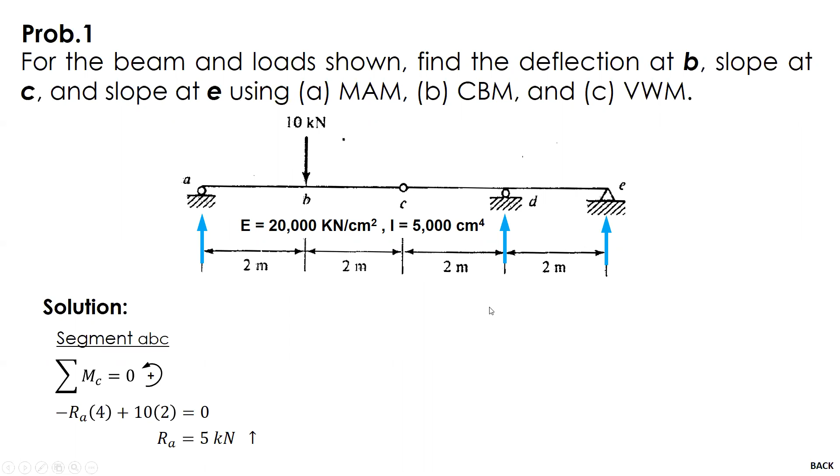So muna ang buhaton. You assume the reaction direction upward. Consider segment ABC, sum up moment at C, and you get RA. RA is positive 5, so it's upward. Then consider the whole beam, sum up moment at E, and you can solve for RD. It's positive again, so therefore upwards. Then summation of moment, summation of force along the vertical gives negative 5, so therefore downwards. So the reactions: RA is upward, RD is upward, RE is downward.

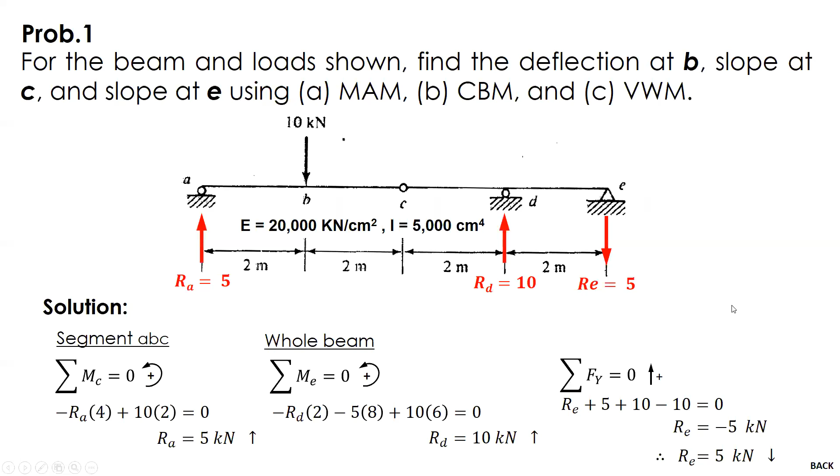So for the moment area method, once we have the reactions, then we draw the moment diagram by parts.

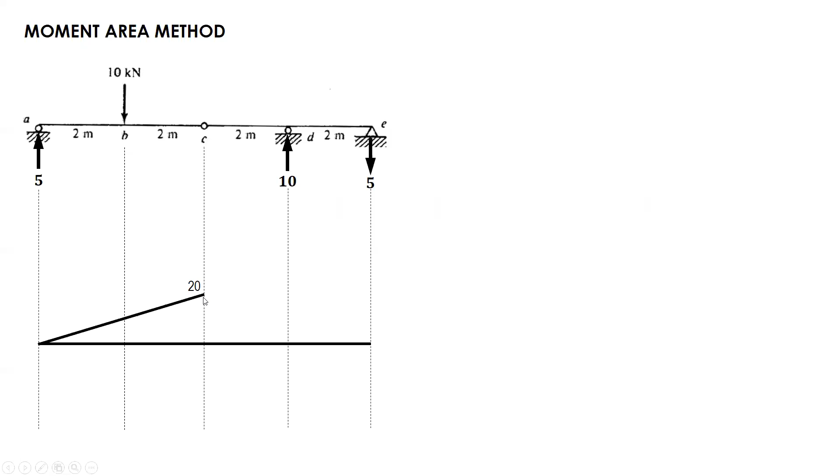The most convenient point is the hinge, so we fix it there. And then we draw the values: 5 times 4 is 20, and this one, 10 times 2 is 20 also. Then 10 times 2, 20. 5 times 4, 20. 20. 5 times 4, 20. So this is your moment diagram by parts.

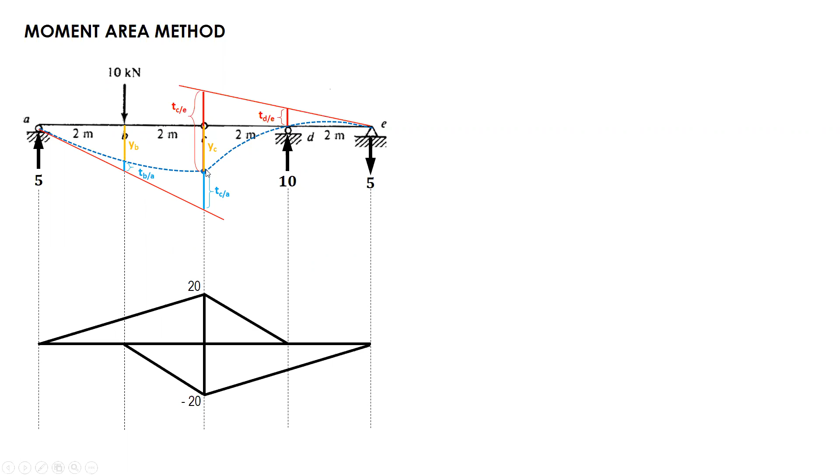What we need to find is the deflection at B. So in order to solve for YB, we use ratio and proportion by similar triangles - 1 over vertical over horizontal, vertical over horizontal. But before we can solve for YB, we need to solve for the deviation of B slash A, deviation of C slash A, and also YC.

For YC, we manipulate from this side. The deviation of D slash E, and then deviation of C slash E, and then we do ratio and proportion to get YC. And then after that, combining the two, we get YB.

So let us first solve for this one, the deviation of D slash E. You'll be considering the area from D to E. So by ratio and proportion, 10 is to 20, and the area is negative 10: 1/2 of 2 times 10 is negative 10.

To make it straightforward, deviation equals area times distance. Deviation of D slash E: area negative 10, times the distance from the centroid to D, since D is where we're getting the deviation. So 1/3 of 2 is 2/3, giving negative 20 over 3.

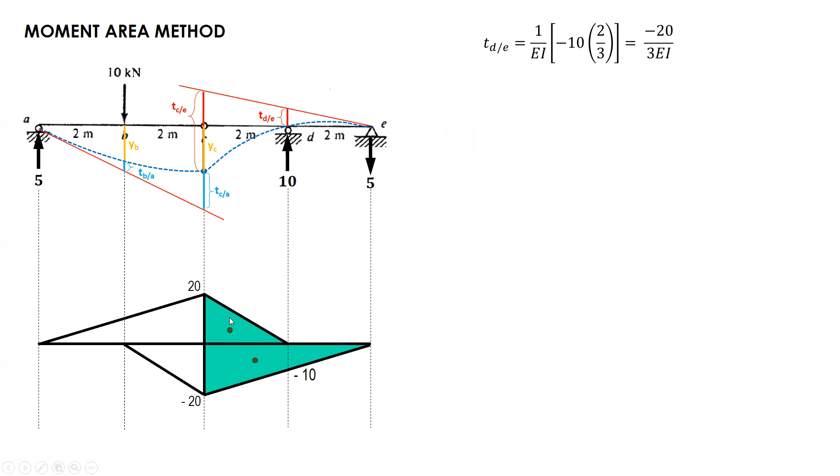And then for the deviation of C slash E, we get the area from C to E. The negative 10 goes away. So the area is 1/2 of 2 times 20, which is 20. Then 1/2 of 4 times 20 is 40.

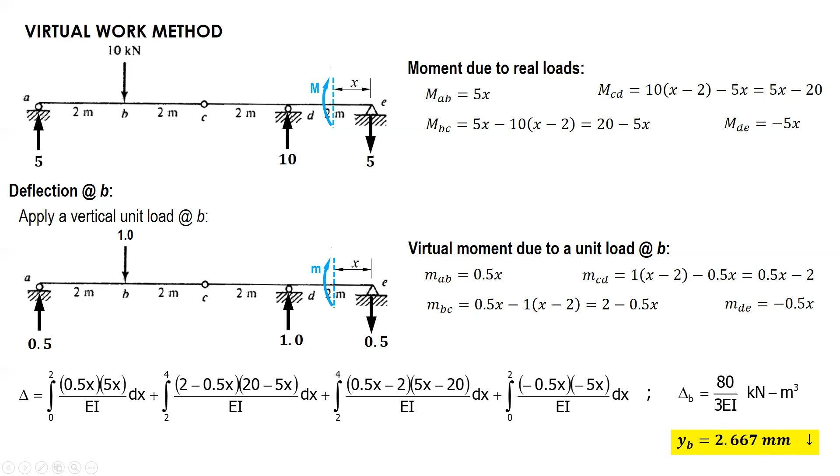Okay, so okay na ni. Next.

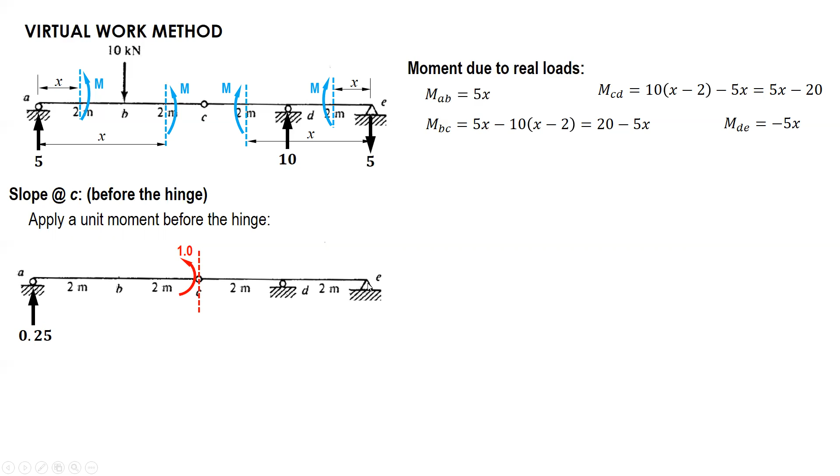And then considering the whole beam, summing moment at E, you get RD. You can just compute - the answer is 0.5. And the summation of force gives 0.25. And then moment, cut: 0.25x.

That's the moment, so directly that would be 0.25x minus this. The result is 1 minus 0.25x, and lastly for DE, 0.25x. And then it's the virtual work equation - none of them are zero, so all are evaluated.

And when you solve this, the result is positive. Therefore, counterclockwise - same as the other methods.

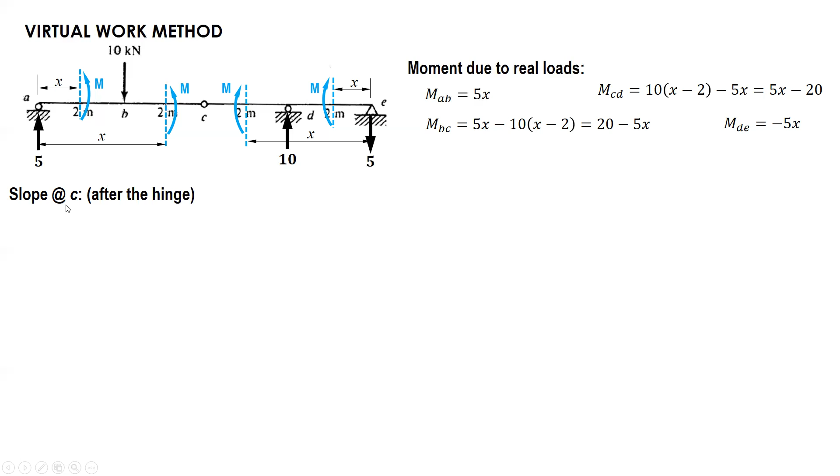And then lastly, after the hinge, you should not apply the moment after the hinge. So this is what happens - if you apply the moment after the hinge, when you cut the moment at C and analyze the left side, it will not be affected. This will not be included in summing the moment. So it's zero, since you wouldn't cut it there, but since the moment is after, there's no force or moment on this side, so it becomes zero.

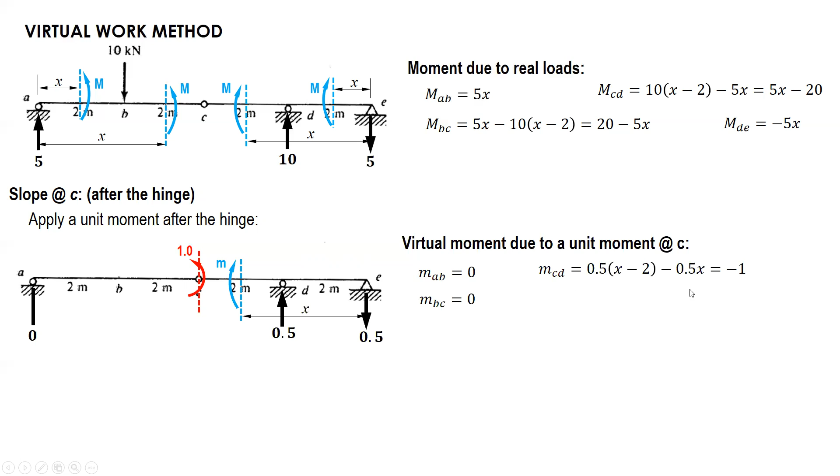And the result is positive 50/3EI. Positive means counterclockwise - same as assumed. Okay, so this is the answer for problem number 1.

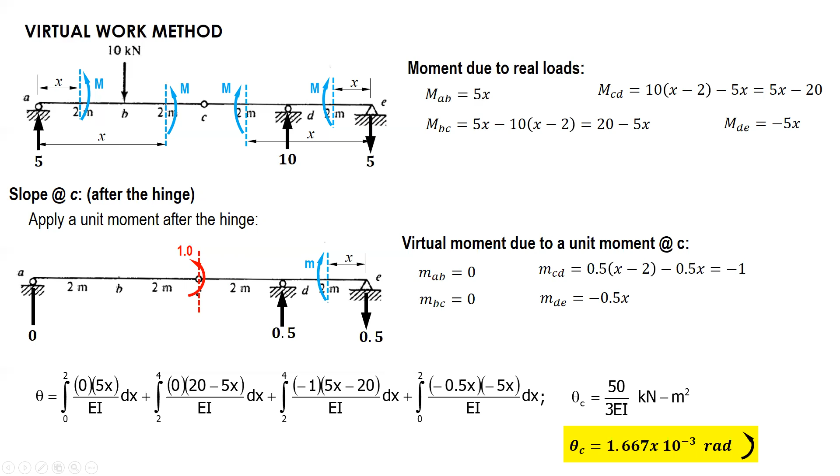For problem number 2, the overhanging beam is loaded by a uniform distributed load as well as a concentrated force as shown in the figure. Determine the maximum deflection using the double integration method, moment area method, and conjugate beam method. Use E equal to 30,000 KSI and I equal to 400 inches to the fourth power.

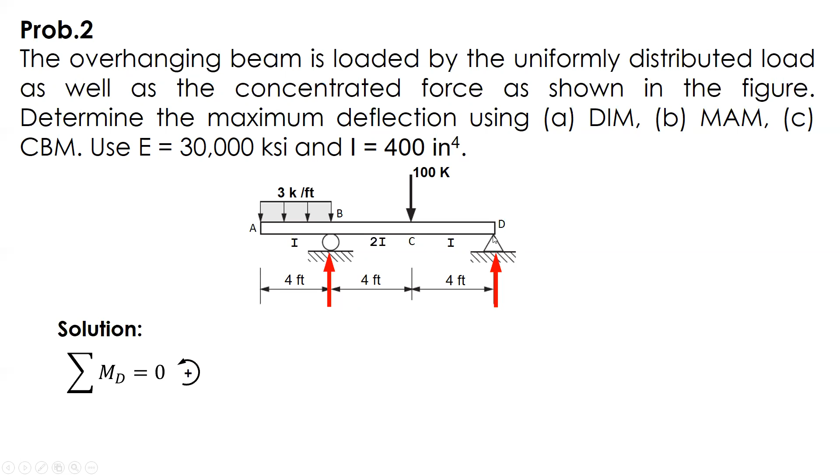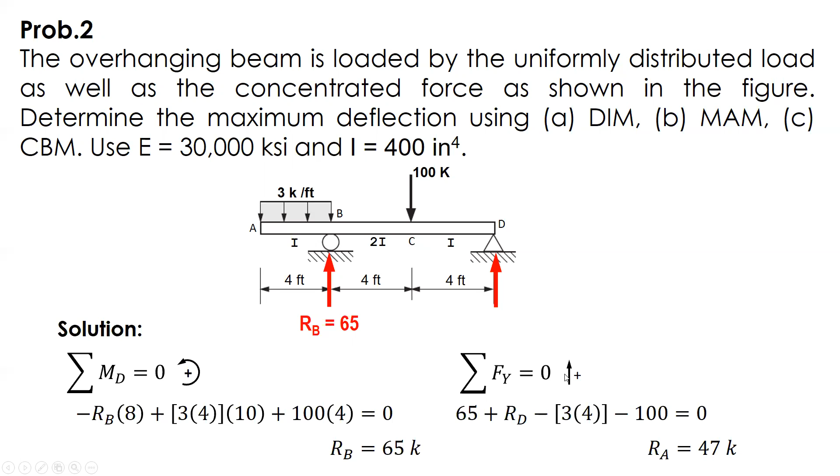First, solve for the reactions RB and RD. Summing moment at D gives RB, which is 65. And then summation of force in Y gives 47.

Okay, so for the double integration method, segment by segment: AB, x - so this is the equation. 3x minus 3x times x over 2, which simplifies to negative 1.5x squared. The resultant is 3x, and the distance is x over 2. So integrate - the result plus C1, integrate again for moment.

And then segment BC, cut here. This is your x. So your moment is 65 times x minus 4 for this one. The resultant here is 3 times 4, which is 12. The distance is x minus 2, which is 4 minus 2.

And then integrate, take note of our I is 2i. So that's it.

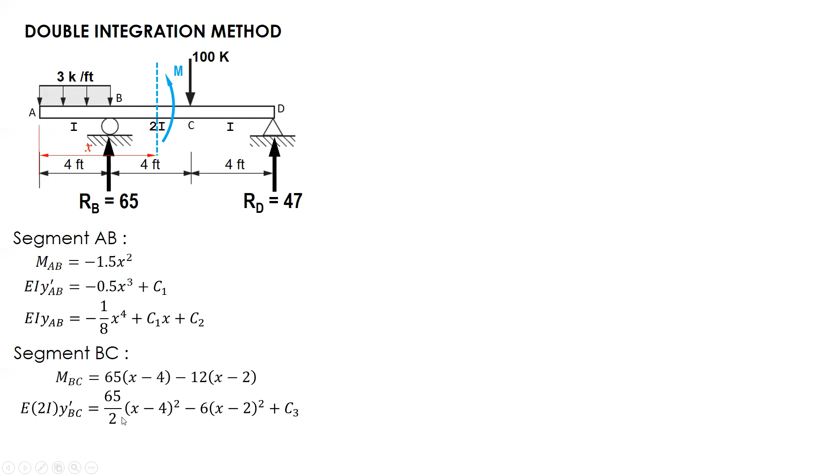So to simplify, divide it by 2. 65 over 4 becomes, and 6 over 2 is 3. The C3, if you divide it by 2, it can still be C3, even in DE, right? It's just a constant. Constant divided by another constant, the answer is still a constant. So it doesn't matter if it remains C3 or becomes C3 over 2, the final answer will still be the same.

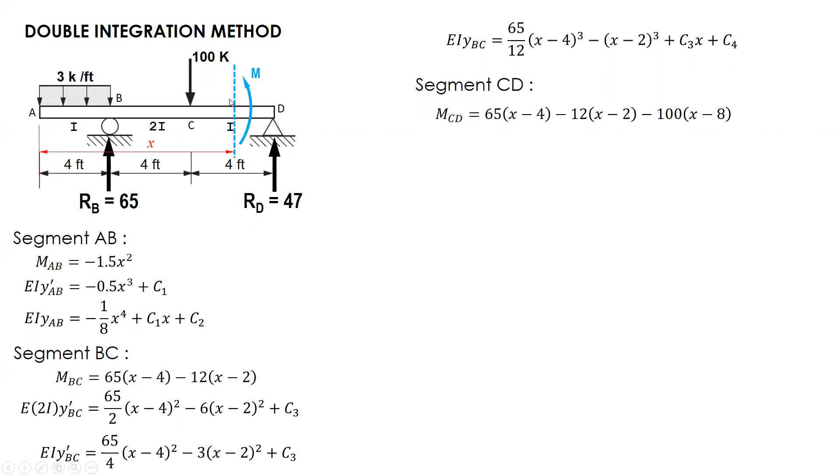You will have 6 unknowns. So boundary condition, okay, let's start here.

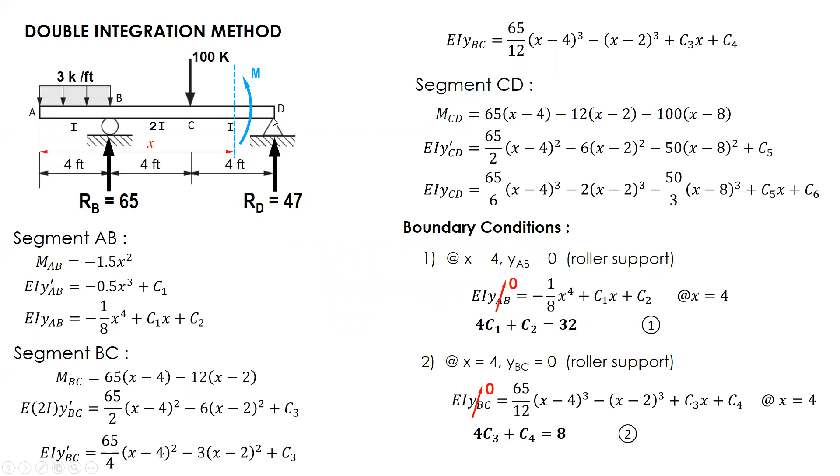Equation 2. And then at x equal to 12, here, YCD equal to 0. So 0, and then substitute 12, 12, 12, 12, and 12, you will have this.

Equation 4, slope AB equals BC. At x equal to 4, just substitute, it becomes 0, 4 minus 2. You will have this.

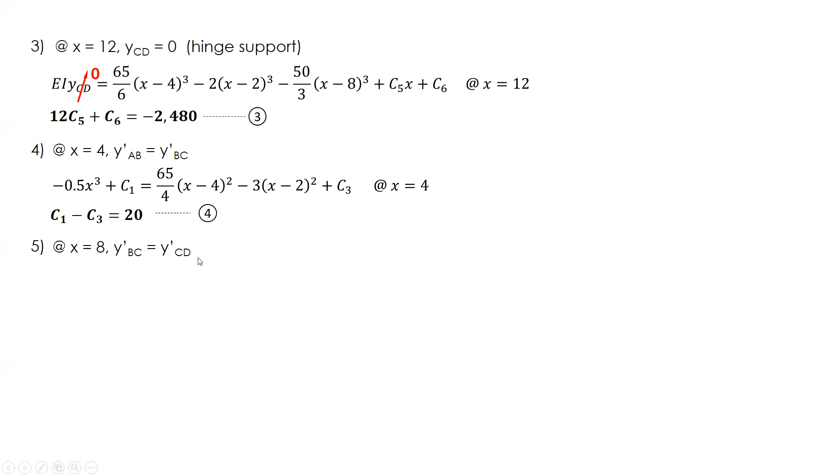And then 5, at x equal to 8, junction C. Slope BC equal to slope CD, this one, at x equal to 8. Just substitute, 8 minus 4, and that's the result.

And then last, at 8, deflection BC equals deflection CD. This one, at x equal to 8, you will have this. Just substitute 8, 8, 8, 8, 8. This becomes 0, then 8.

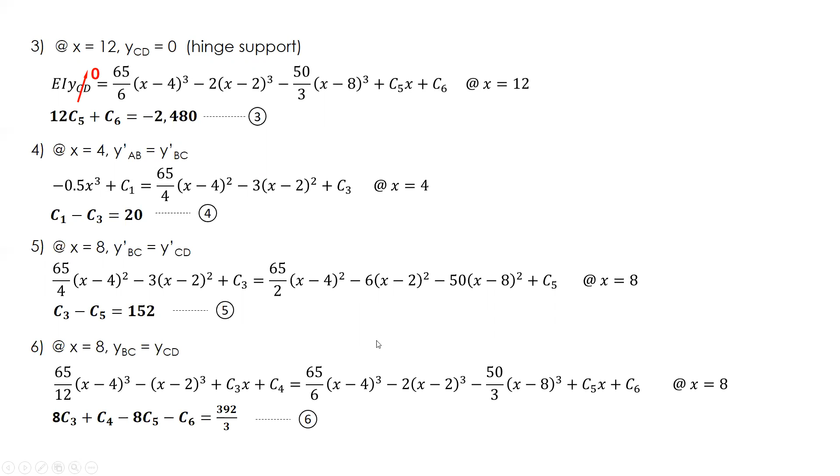Equation 6. So let's summarize the 6 equations. That's it. Equation 1, 2, 3, 4, 5, 6. Easy, we'll just eliminate.

First, let's eliminate C6. Let's combine 3 and 6. To eliminate C6, we add them. Equation 3 plus 6, and this will cancel out. So 8C3, C4, 12 minus 8, so 4, right? That's it, 8. Negative 2480 plus 392 over 3 is the result.

Equation 7. Next, eliminate C1. Combine 1 and 4. To eliminate C1, we multiply equation 4 by 4, and then subtract so it cancels. What's the result? So C2, then 4C3, right?

But it becomes plus since we subtract it, minus, negative, so positive. And then 32 minus 4 times 20, negative 48. Equation 8, right?

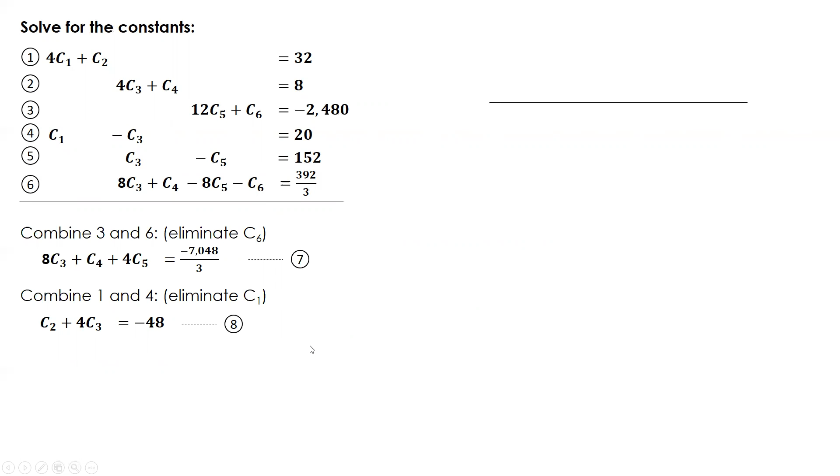Okay, we cannot eliminate C2, so there's no line for C2 here. So next to eliminate is C5. Okay, let's combine.

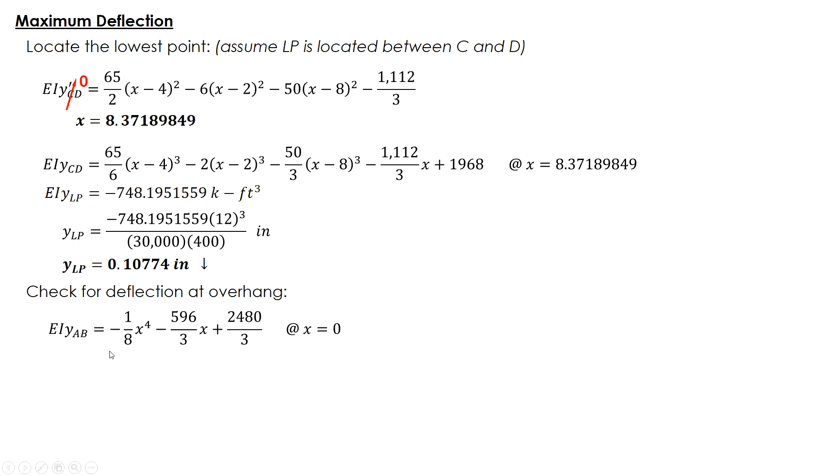Substituting the values and converting, the result is 0.11904 inches, which is larger compared to the rest. Therefore, this is the maximum deflection, occurring at the overhang.

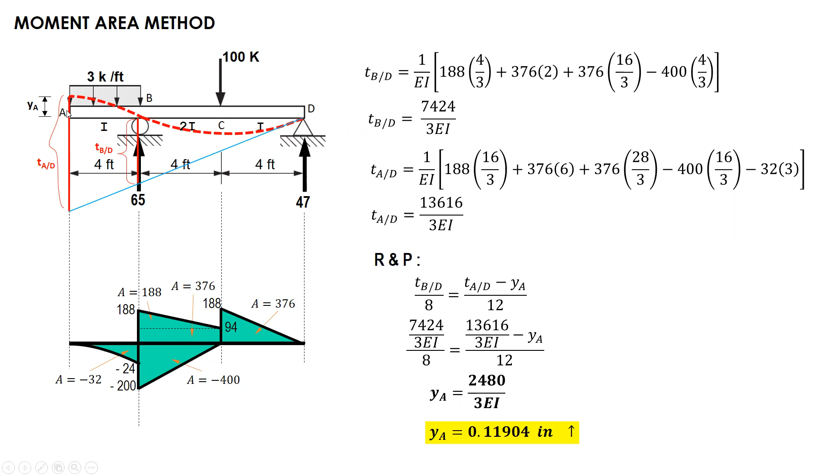And the last method, the conjugate beam method, we'll use the same moment diagram as in the moment area method. Since it's free, it can become fixed, and this becomes an internal hinge.

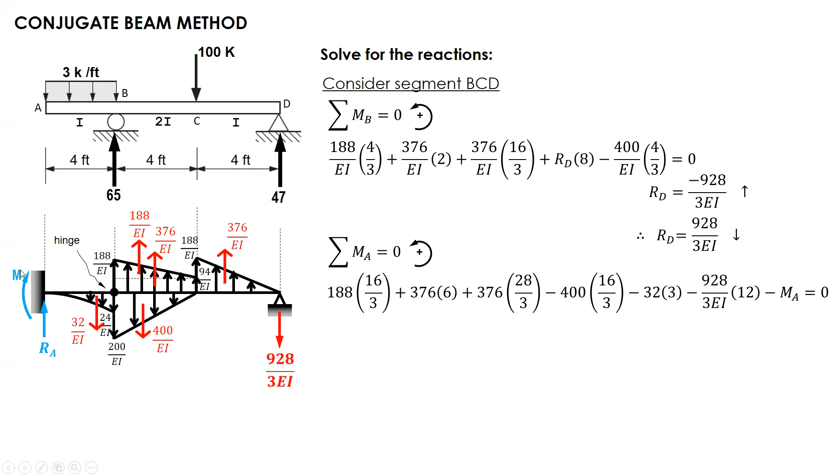Summation of moments at A is positive, because according to the sign convention, if the beam smiles, the moment is positive. That's our sign convention. Summation of moments at A, and whenever dealing with moments you always consider this sign convention, and since clockwise, it's negative.